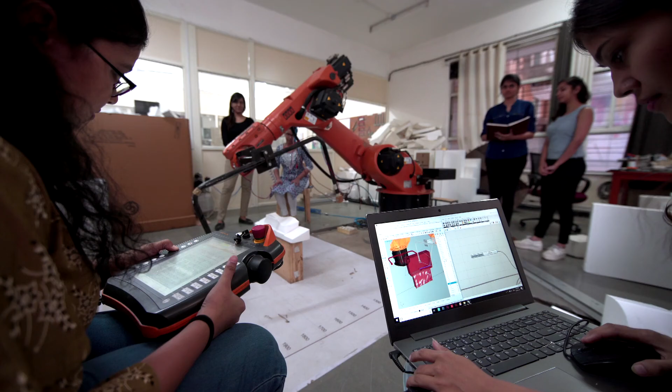We realized over the last 25 years that architecture is changing very fast and new cultures are coming, mainly due to software-driven designs and parametricism in design, all of which come under digital architecture. So our Fab Lab, including robots, 3D printers, laser cutting machines and CNC machines, became the first of its kind Fab Lab in the Asian subcontinent.

We have been using Trimble SketchUp for more than a decade, and we are in the process of establishing a Trimble Technology Lab for our students.

3D technologies were introduced to us in the first year, and SketchUp was so easy to use that it felt like we were drawing in 3D. We've been teaching this software to students since their day one. It really helps them visualize the space in all three dimensions.

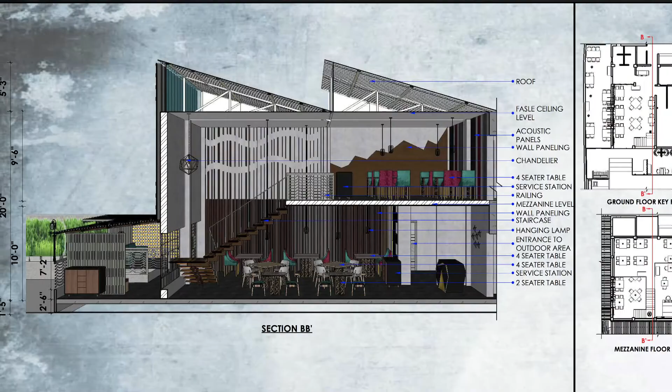We are also looking forward to integrating Sefaira in the coming future, which will help students come up with energy-based designing. We have extended our workflow of using 3D models and taken it into LayOut, where we rationalize them and create working drawings, which helps us take the project to the next level of execution.

Ours is a digital course that is completely paperless, where our students use different software to transform their ideas into reality. What we do here is a typical digital architecture course which runs on computation.

It uses three verticals of digital mediums. The first vertical is digital computation, then analysis, which helps inform our design, and the third part, as you have seen in the infrastructure, is digital fabrication.

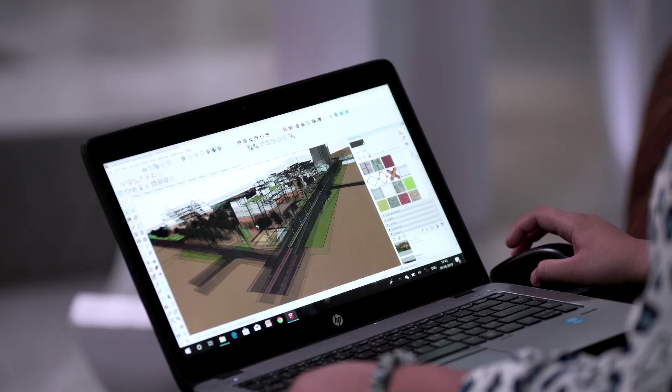I live in a city known as Pune, in an area known as Kothrud, which is the fastest growing area in whole of Asia. As it is a dynamic area, we had to deal with a lot of urban issues such as traffic conditions, problems of hawkers, relocating hawkers, and so on. So we did a very huge pre-study for the same.

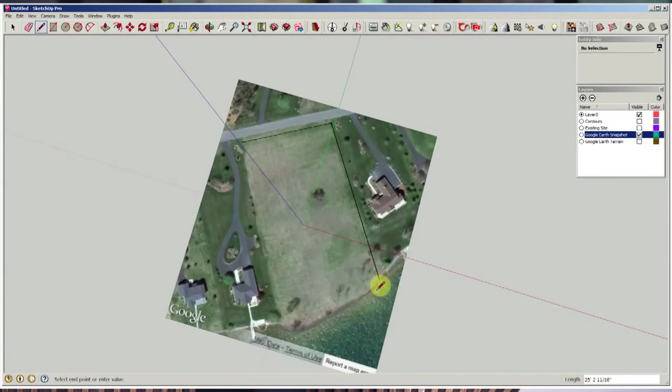I got a terrain from the geolocation in SketchUp. So this is my final proposal, where I incorporated this urban insert in the area of Kothrud, where the urban grain just matches with my proposal.

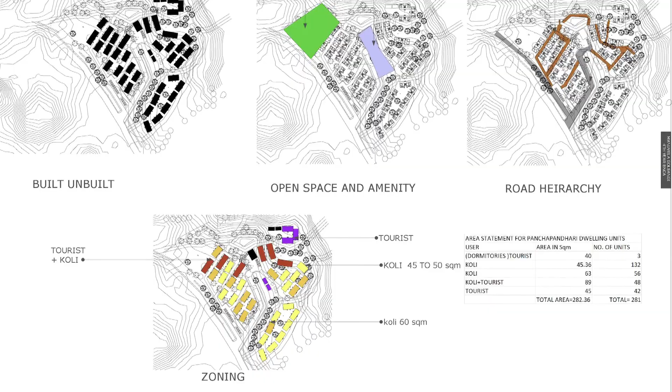It was really easy because of this 3D modeling, that on a single click I could give a lot of sections to my professor, so I could really sleep at 10 PM.

While we were using different softwares, we realized that we were able to make 3D prints directly. So we had access to the digital fabrication lab, where we were able to make prototypes like this. This is a bar chair that I made in SketchUp software.

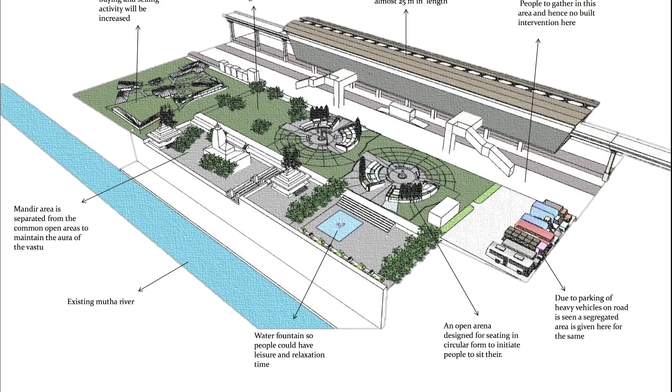Currently, work of the Metro is going on in Pune, and with this, there are going to be many changes and developments in the urban fabric of Pune. We had to propose many built and unbuilt interventions, such as redevelopment of various structures and redevelopment of streets that were abandoned.

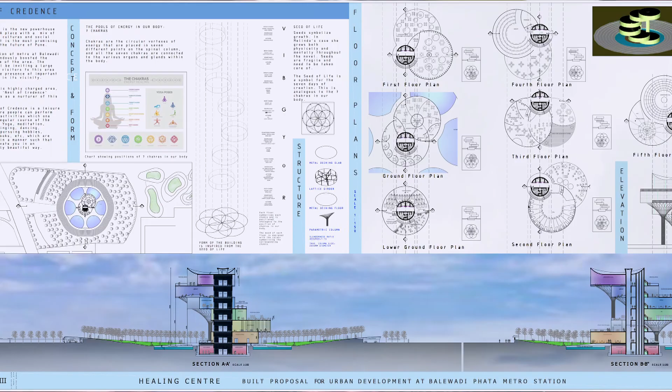To do all of that, we used shadow analysis to understand which areas could be used more, and it helped us a lot in deciding the interventions. Also, our project was of a very huge scale, and because of SketchUp, it was easy to handle the scale, and we were able to complete the project in a very short time.

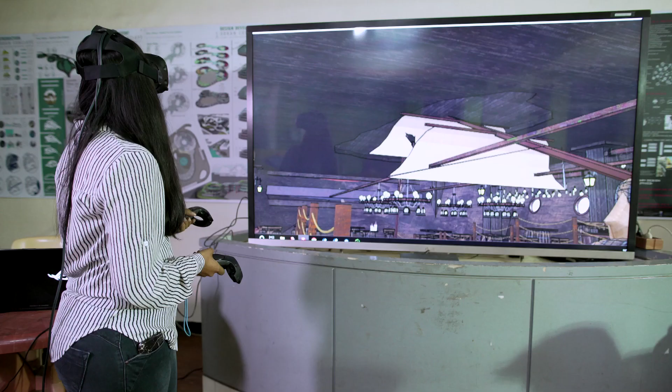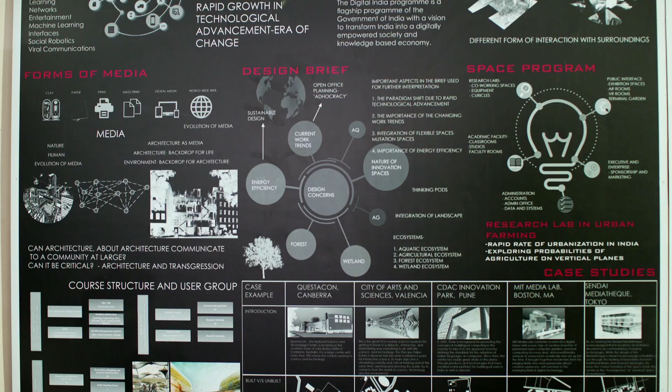There is wonderful research happening in sustainable green building material, which is being done in our lab. SketchUp does help us big time because it helps in primary visualization, and the interface is also very, very simple. So it is very important for students coming from undergraduate studies to use this medium. SketchUp is a big help in what we aspire to do, and most of our students use this platform along with other platforms to do what they do digitally.

It's very important for India as a nation to understand what the global aspirations are and to prepare our students in the academia to match up to those global aspirations.